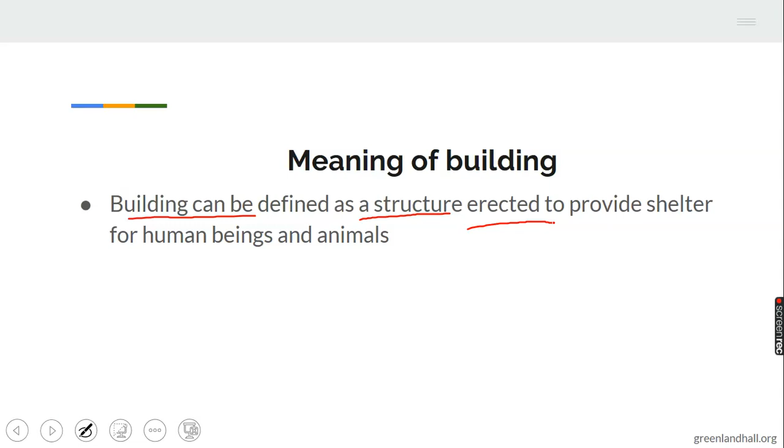Now, meaning of building. Building can be defined as a structure. What is a structure? A structure is a substance with a well-patterned arrangement, solid, strong, and appealing to the views. Building can be defined as a structure erected to provide shelter for human beings and animals. When you think of building, you don't think about human beings alone, you also think about the animals.

Types of buildings. Here we are going to categorize building into two types based on their identification. The first one is that we are going to classify buildings according to the types of materials which they are erected. We are starting with number one, mud building.

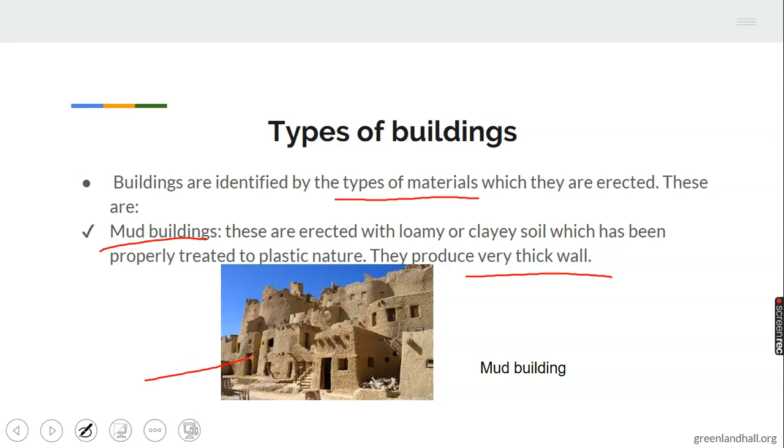The word mud building should bring your mind back to mud. When we say mud, we are talking about loamy or clay soils, which has been properly treated to plastic nature. How can we do this? Get a lot of loamy or clay soil, add water to it, then stir it very well. After that, pound it again until it begins to behave like a plastic. Then that is when you can use it to build. They produce very thick walls. The diagram here is a good impression of what mud building looks like.

Second on the list, based on the materials on which buildings are erected, is brick building. The word brick building means the building that are molded from dry mortar. Dry mortar is a mixture of cement, sand, and sometimes clay. Bricks are of two types: the sun-dried brick and the fire-burnt bricks, which is otherwise known as the red brick. The sun-dried brick is a brick that is molded and allowed to dry or lose its moisture under the sun. The second one is fire burnt brick, also known as red brick.

This red brick, after it's been molded, will be allowed to dry under kiln, it will be fired under kiln. The fire burnt brick is better than the sun-dried brick because it is stronger, more durable, and better colored than the sun-dried brick. So in Nigeria...

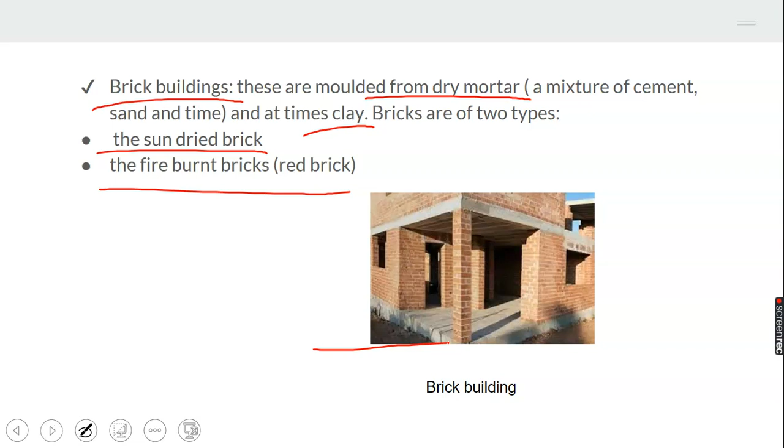We have brick industries in Ekiti, Nigeria, that's Ekiti State. So you can take an excursion today to see. Here is another example of a red brick, it is very good. Even sometimes if you build with brick, you don't need to paint it at the end of the day because it is appealing to the views.

Now we have sandcrete buildings. What should sandcrete cast your mind to? Blocks. You've seen building blocks. Blocks are made from the mixture of cement and sand with water, after that you put it in the mold and they are allowed to dry. So the blocks are then used for building. You can see this man laying the blocks on top of one another with cement, or mortar rather, so as to make sandcrete building.

Then wood buildings. Wood buildings can be erected with either log, timber, or plywood. When you talk about timber, it is log that has been sliced into appropriate sizes. Plywoods are soft woods that are usually used for demarcating houses, buildings, and sometimes used in roofing in support of asbestos.

So wood buildings are common in riverine areas. There was a time I went to Ijaw area in Delta State, I saw many wood buildings. In fact, the foundation of the house is wood because the house was on top of water. It is going to be very interesting to see.

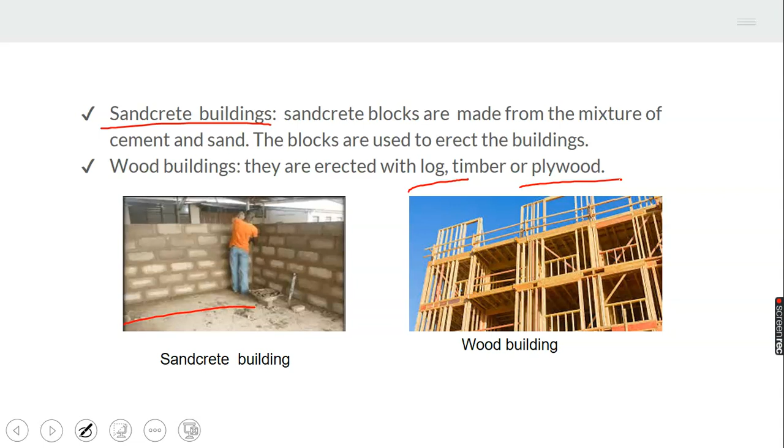Let's move to the next one. Building type could also be identified by their construction design. Don't forget, we categorize building into two. We have looked at the first aspect, the aspect of building classification based on the materials for erection.

Now we are looking at building type of classification based on construction design, that is, the outline of the arrangement of the wall and the height of the building.

Under this we have hut. What is hut? Hut is a small unit of ancient design, built with mud, usually round in shape, and usually covered with thatch roof. I hope you are noting the key words there, and I'm underlining it as you can see.

Hut is usually found in the village and some hotels. It is usually used by nomadic farmers and some farmers that have their main house far away from the farmland. They can stay there 2 to 3 weeks and then come back to their normal house. Hut is a temporary building because it cannot last for a very long time.

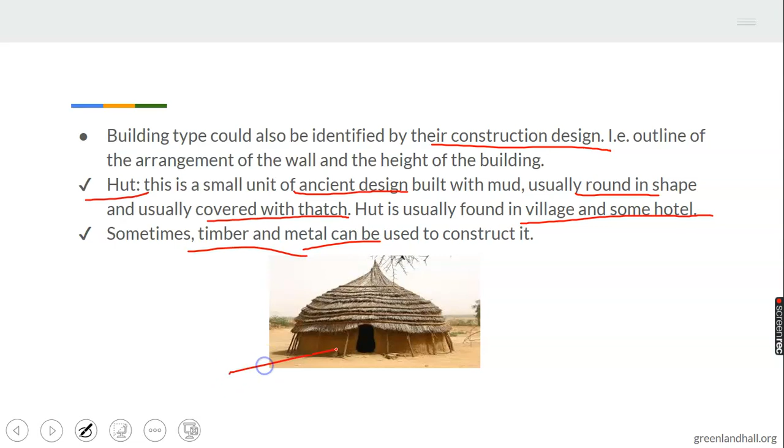Moving forward, we have bungalow. These are buildings that only occupy the ground floor. Note it, the ground floor. A flat design can accommodate a single family unit, and a multi-unit room design can accommodate more than one family unit.

So bungalow is just a ground floor building. There is no upstairs in it, and it can contain many rooms based on the design of the architects. One or more family units can live in a bungalow.

The next one is duplex. This is a compact story building. Usually roofs at the first floor are only designed to accommodate a single family unit. So duplex is a compact story building. It can be a 2-story building, it can be a 3-story building. But at the first floor, you will see a roof.

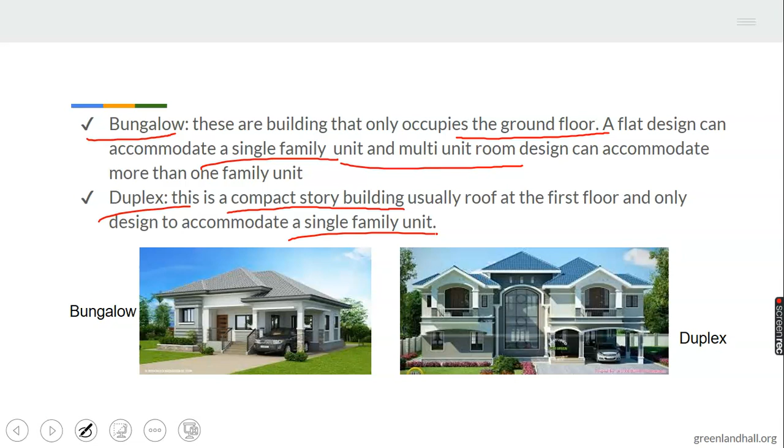At the first floor, you will see a roof there. So take note of it. Any house that you see a roof at its first floor is a duplex. This is a duplex. So this is a bungalow and this is a duplex.

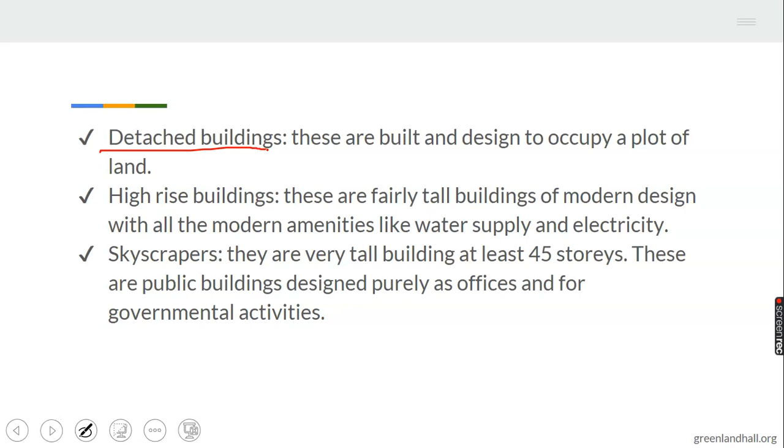Now, detached buildings. The word detached means to separate one thing from the other, or to leave a gap between one thing and the other, making sure that they are not together. So these are built and designed to occupy a plot of land. For example, your estate. If you go to your estate, you will see different buildings being detached from one another.

Next is high-rise building. High-rise building means the building is very tall, very high. And they contain modern design with all the modern amenities like water supply and electricity.

Now, skyscrapers. This is the master of all the buildings because they are very tall buildings, at least 45 stories. You cannot just walk it, you have to get a lift to help you get to the top of the building. And they are public buildings, designed purely as offices and for governmental activities.

If you check, you will see the picture of the tall story building destroyed by Osama bin Laden, in USA, America. That was a good example of skyscrapers.

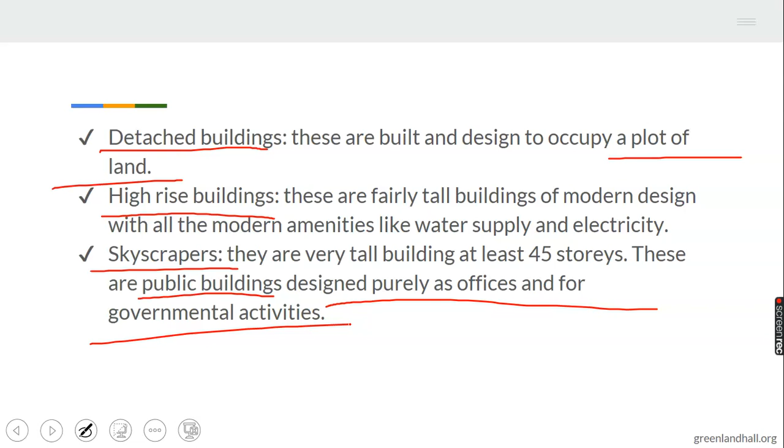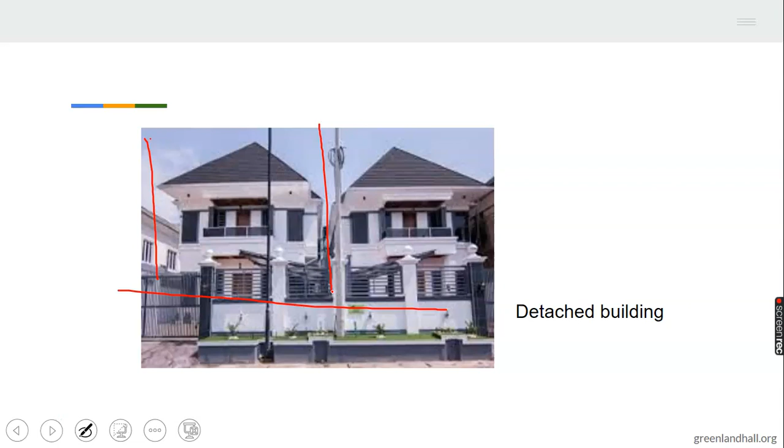So this is a detached building diagram or picture. You can see the buildings are in the same compound, but they are differentiated from one another. I mean, they are detached from one another with gaps in between them. This is a good example.

Now let's look at it. We have talked about buildings, but let's discuss what are the common building materials. Because once you know you can recognize buildings, you should be able to ask yourself, what are the common building materials? Some of you may know some of it, but let us study it more.

Sand is first on our list. Anywhere you go, you see sand because it is the most common building material. Even if you have your channel or gutter, where you can pack sand after raining, you will get some sand that will be useful to make cement, and useful to make blocks that you need for building.

They are common, but you cannot just use any sand. There are two main types of sand that are allowed for building. They are soft sand and sharp sand.

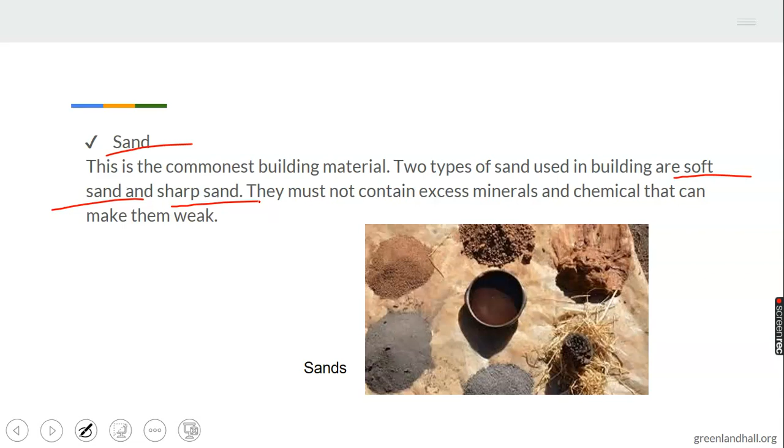Okay, why do we need them? Because they contain little mineral matters which are easily weathered and make building become fragile or weak. That is why you go for them.

Then we have gravel. Gravel is derived from weathering and erosion of rocks. Weathering is the breaking down of big rock particles into smaller fragments as a result of rain, temperature, glacier or ice, and other factors. Rocks are also blasted and broken down to gravel, e.g. granite. Granite is a major rock that is blasted to acquire gravel in quarry activities.

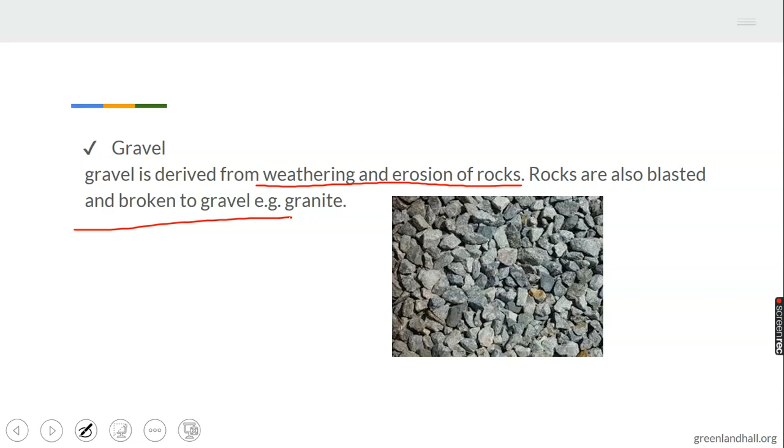Cement. Cement is a finely powdered manufactured substance consisting of gypsum, plaster or Portland cement. It hardens and strictly binds other materials together. Think of cement, it's very important. If your blocks cannot match perfectly without breaking, you need something to bind them together. And you have to think of cement. Very, very important.

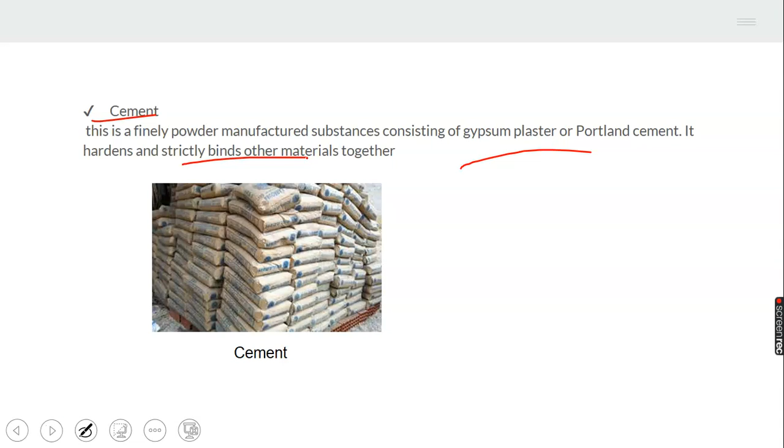Wood. Woods are used to produce wooden doors, ceilings, windows, roofing, etc. Check around your house, you will see woods in parts of the buildings. They are very important, especially in roofing. The other material you can go for during roofing is iron, but most people don't go for iron because it is very expensive. So people prefer wood in roofing houses. Wood is affordable and cheaper than iron.

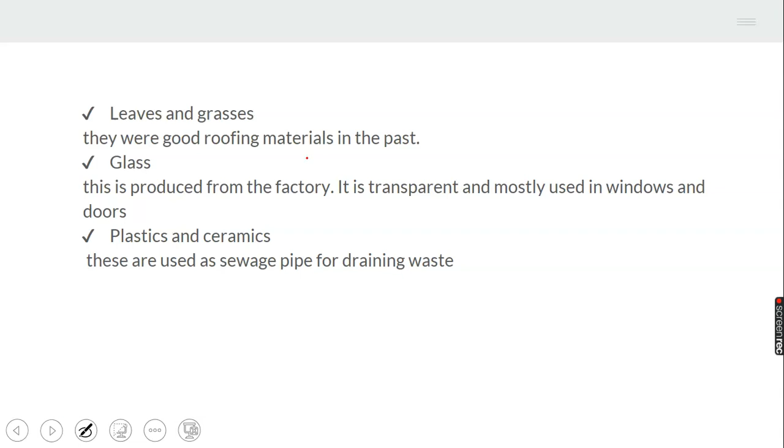Next is leaves and grasses. Have you ever seen a house built or roofed with leaves or grasses? I have seen it, I know some of you have not. In the olden days, they used leaves and grasses to roof a house. Even in the village, you will see palm tree leaves whipped and used to roof the house.

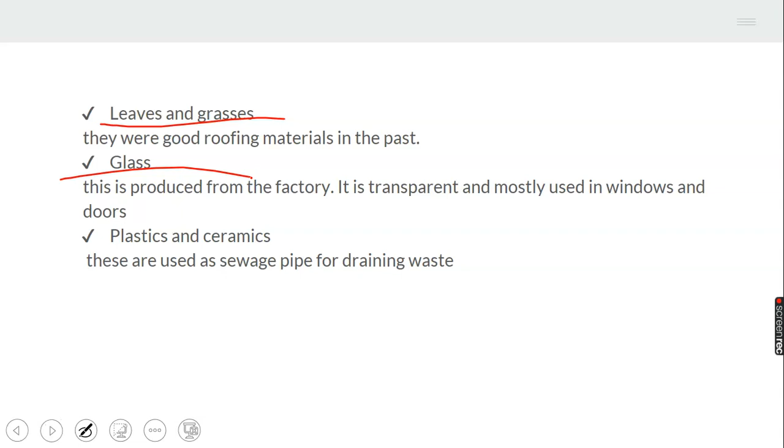Then glass is another important material. Glass is a mixture of sand and other particles. It is very transparent and gives attraction to the building. These days, hardly will you see a house where there's no glass as windows. You see sliding windows, they are made of glass. That's a typical example. Even all the banks, the front view of the bank, you will see that they are filled with glasses.

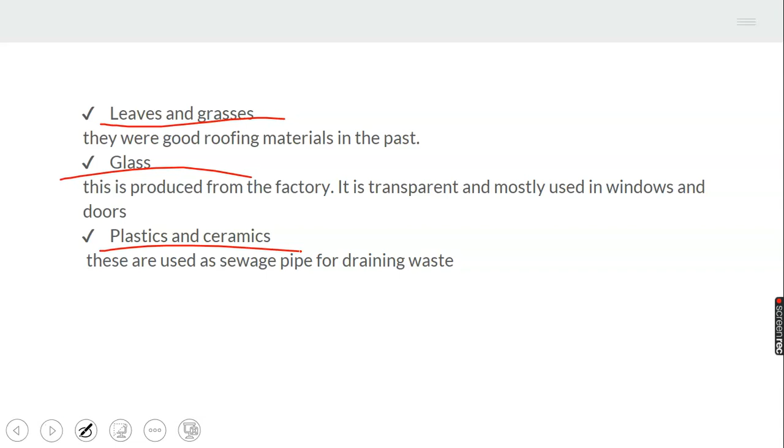Plastic and ceramic, think about it. Your water connection in the house done by the plumber, they make use of plastics for connecting water around the house. And even ceramic, your WC, that's water closets, and other draining waste or draining boards are products of ceramics. Then look at a very attractive house with roofing grasses and glass. Very interesting.

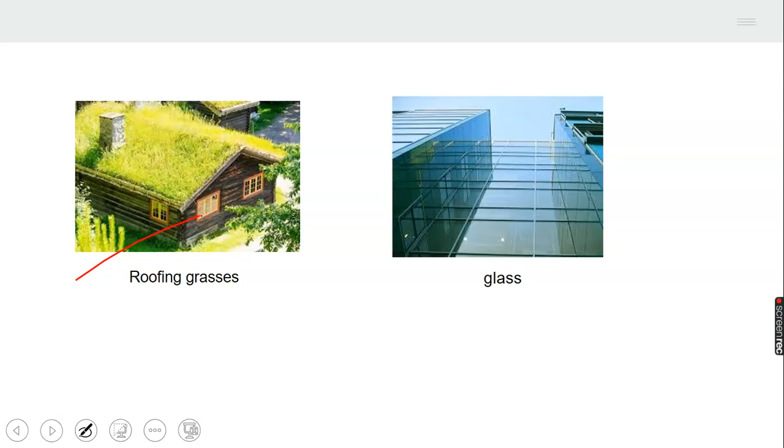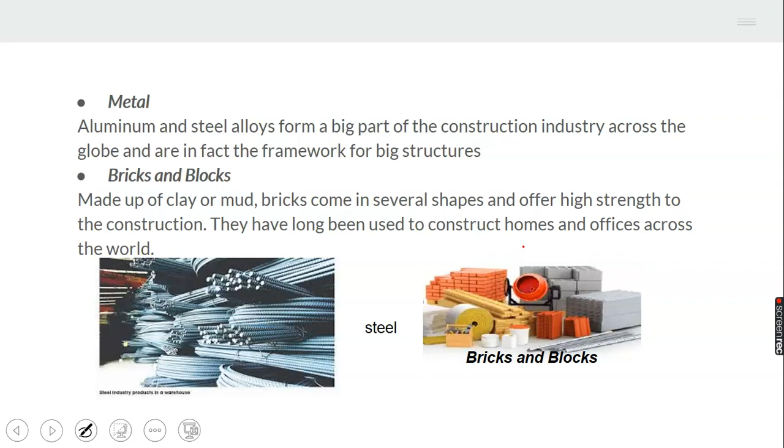Then metal. Out of all the metals, aluminum and steel alloys are the most used for building construction across the globe. Why? Because aluminum is cheap, affordable and very attractive, it can be coated. Steel alloy is very strong. If you look at a bridge, there is no bridge that can be constructed without iron in it. There is no story building that can be decked without using iron together with concrete to bring about durability. So they are very key and important. Plastic, wood, ceramic plates, I've talked about them. They are also very key and important.